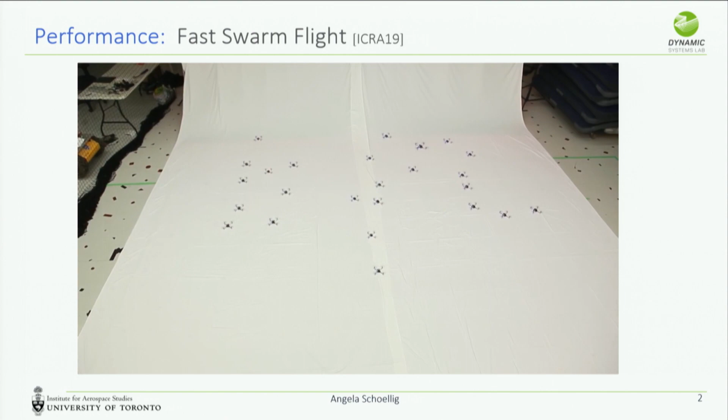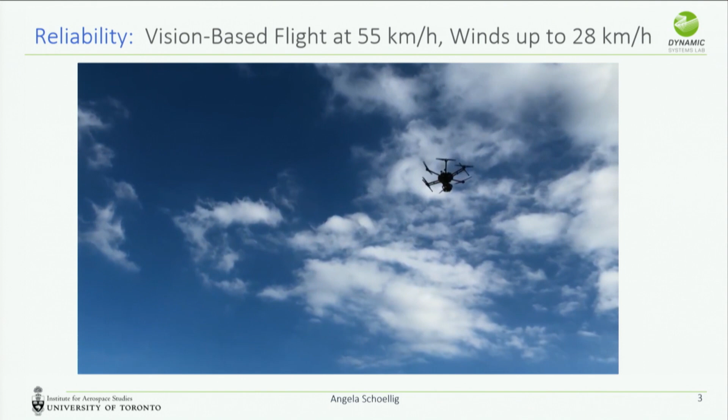We also fly these vehicles outdoors based on vision at speeds up to 55 kilometers per hour, and during our tests we have winds up to 28 kilometers per hour. So we want to fly these vehicles reliably, given that they are outdoors and quite heavy and dangerous.

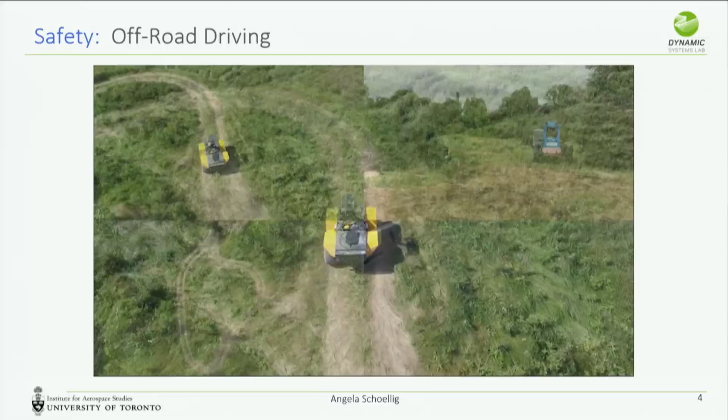We also drive outdoors in varied off-road terrain. Safety here means that we don't get off the path while trying to optimize the performance and the speed of this robot. Finally, we are part of a self-driving car competition, and we had to test in winter conditions in Toronto.

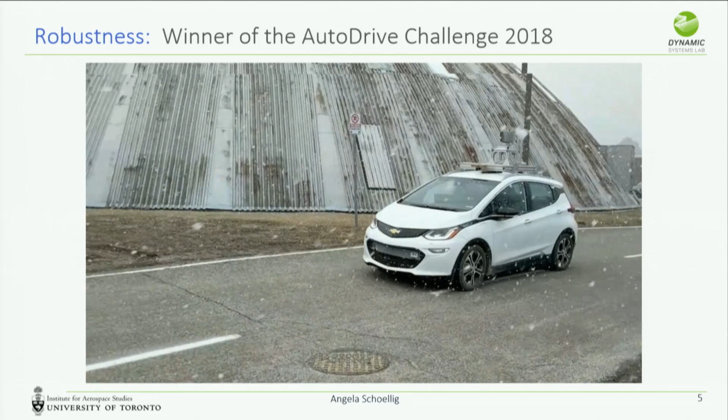Our algorithms had to be robust enough to drive at the competition in the desert in Arizona, and we had exactly 10 minutes to tune any of these algorithms.

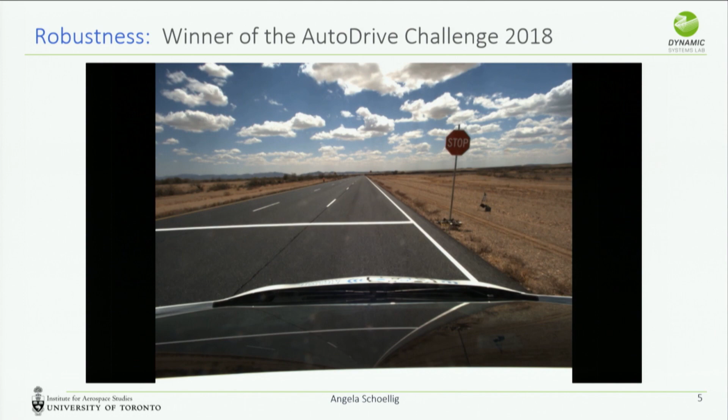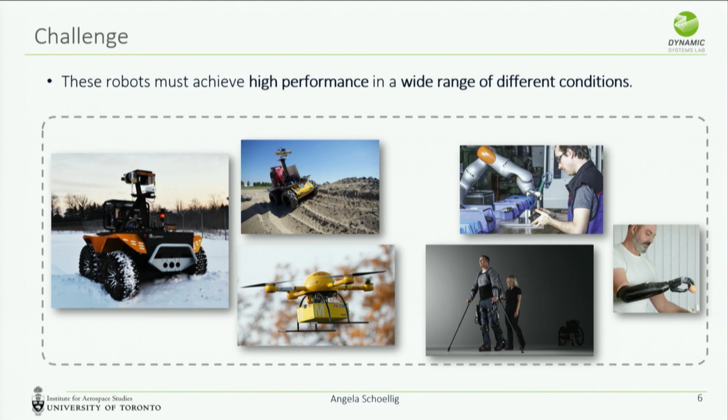So what all these examples have in common is that these robots must achieve high performance in a wide range of different conditions. These conditions can be environment conditions, but in the future, different conditions may mean working with different people and in collaboration with people.

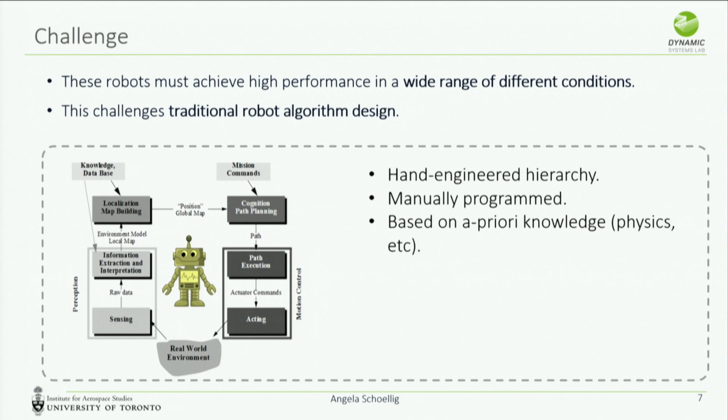This generally challenges traditional robot algorithm design, which looks usually like this: it's kind of a closed loop. We have sensors, then some state estimation, mapping, a planning component, and eventually motion control. All of this is hand engineered, manually programmed, and based on a priori knowledge, for example first principles models of the robot.

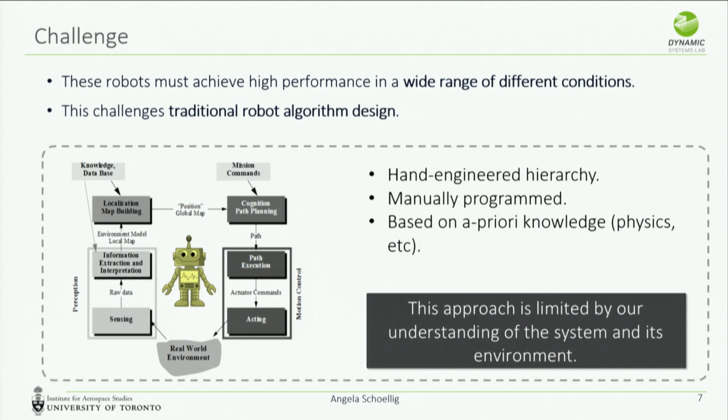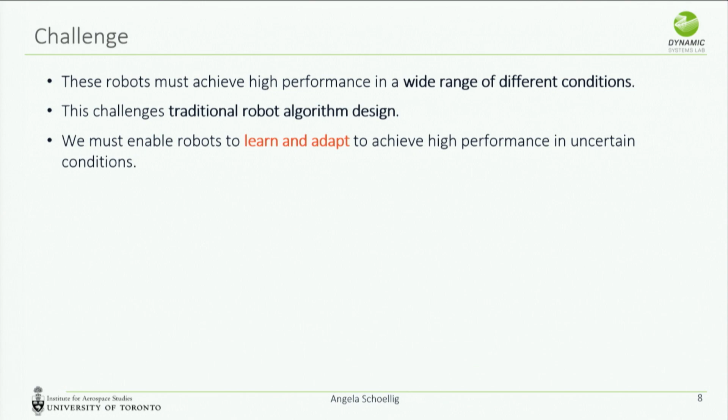So this approach is limited by our understanding of the system and its environment. To enable the applications I showed you in the initial videos, where we have a wide range of different conditions, we really have to enable robots to learn and adapt to achieve high performance in those conditions.

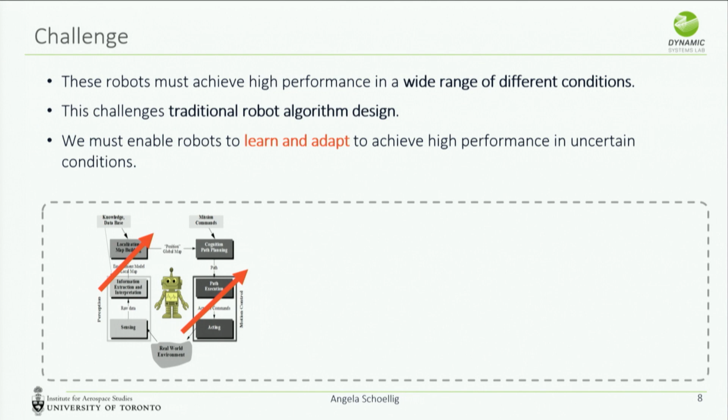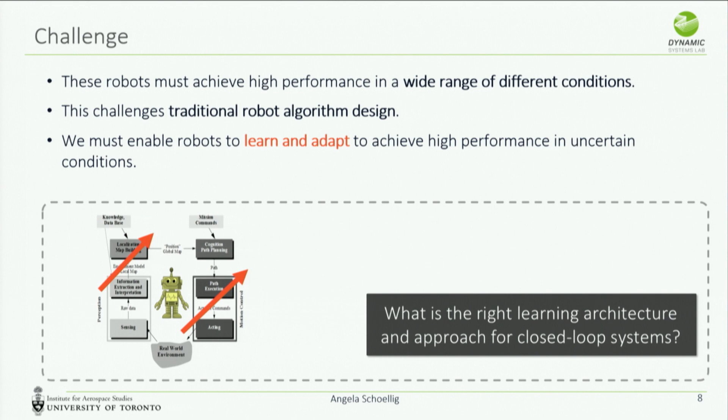Learning and adaptation in this case can mean many different things. You can put a learning component in every module - vision, planning, control - or you could do one big neural network end-to-end from pixels to volts. So I think one really big and interesting question is: what is the right learning architecture and approach for closed-loop systems? I don't think it's really answered yet.

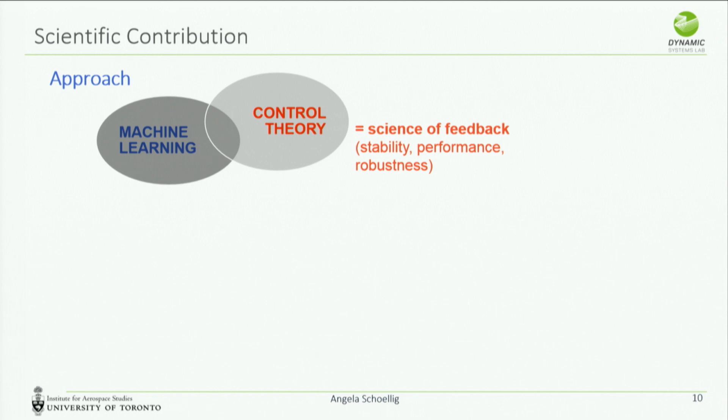The approach that we have been taking over the past few years is combining machine learning and control theory, which is the theme of this conference, which is great. In my opinion, control theory is really the science of feedback - the only science that looks at these closed-loop systems and analyzes and defines stability, performance, and robustness. Machine learning, on the other hand, is the science of data and inference. Both together are a powerful combination to tackle some of these problems.

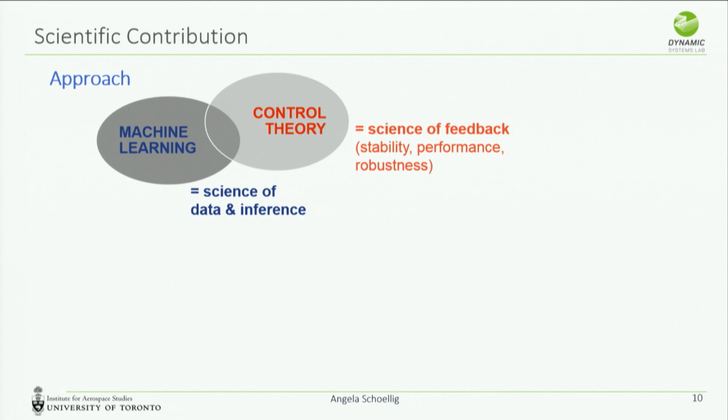The particular focus of our group has been, because we work with real robots in the real world, on data efficiency, because every data point costs money and time; on online adaptation, because we don't assume we have simulation environments that really reflect the real world; and on safety guarantees for these closed-loop systems, because some of the robots we work with are quite serious, and it would be traumatic to destroy them.

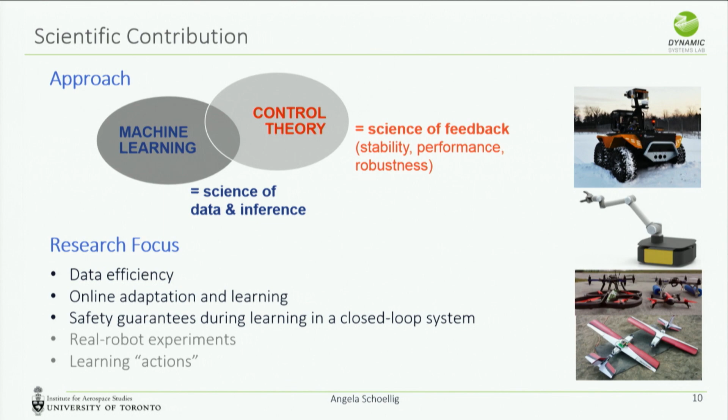So what I thought I am going to do in this talk is highlight 3 themes of the research I found, where I can show you how control theory and machine learning can nicely work together. The first one is architecture and hierarchy. Control theory has helped us a lot in appropriately placing the learning in the overall system architecture.

Control theory and generally system dynamics allows us to understand the system, even if it's complicated and we may not be able to identify all its components. It gives us an understanding, especially of systematic versus random effects - where systematic effects are things a learner can nicely learn from data, versus random effects where the best thing you can do is really fast feedback.

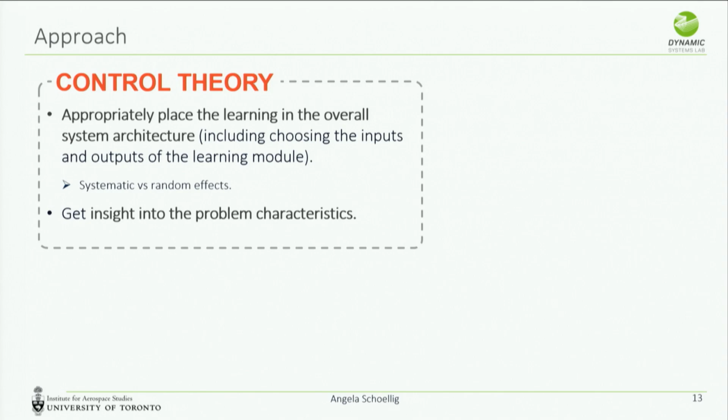As an example here, for flying vehicles, you have these nested control loops, starting with the lowest control loop, which is motor control. The motor controller just makes sure the motor spins at the turn rate you want. At the highest level, if you close all these nested loops, you have position control. In the middle, there's a controller that makes sure a turn rate around a body axis is achieved.

By closing the right number of loops to account for the random effects with feedback, we have a repeatable input-output pattern that is easily learnable in machine learning. I think that's a nice way where both control theory and machine learning can complement each other.

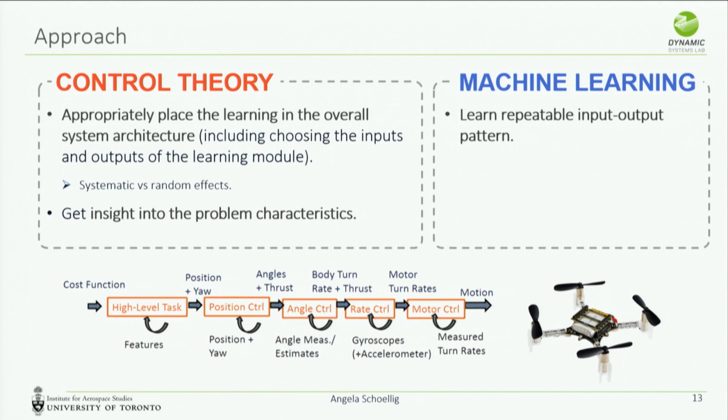One very early example we did is a robot learns a single task through repetition. There we close the feedback loop such that the system is stable, and then we learn the reference signal, the input signal, such that the output does what we want it to do. The basic idea is you run the experiment, you see how much the actual output deviates from the desired output, which is delta y.

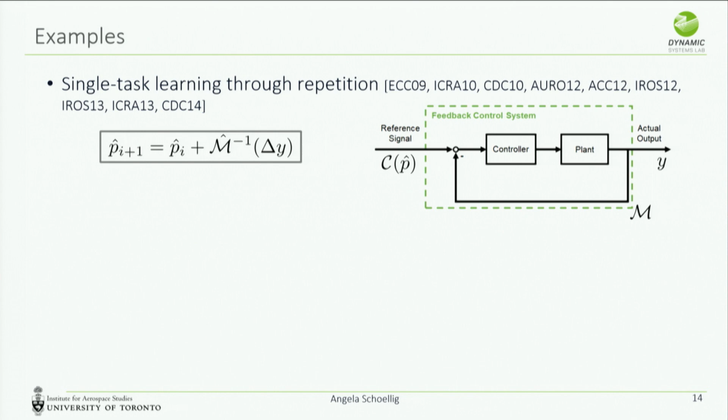Then you use a rough first principle model that relates this output error to a change in parameters, and you change the parameters of your reference signal iteratively in the right direction to eventually get good performance. We did this on flying vehicles with an S-shaped desired trajectory.

If we learn the desired turn rates directly, we can learn that, and our learning converges. But after the reference input converges and we apply it repeatedly, you see the red lines, and they are not a nice S shape. The reason is we didn't close enough lower level loops, so there's still too much randomness in the system.

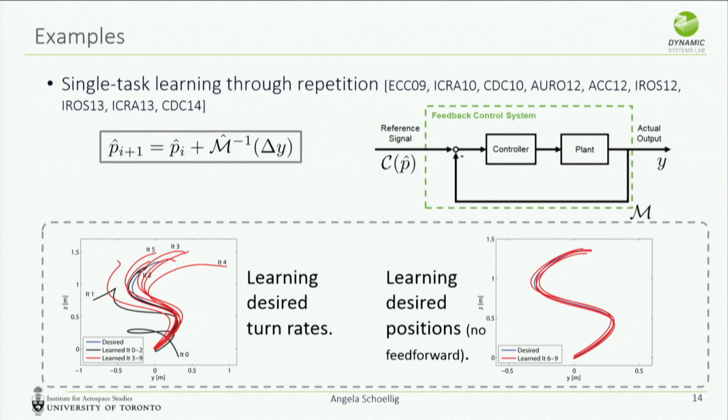So the ultimate performance we can achieve with our learning controller isn't good. But if instead we learn desired positions, with no feed forward—that was the configuration giving the best and most repeatable behavior—then the learning can converge, and the converged reference position input leads to repeatable behavior in the output, nicely following this S-shaped trajectory.

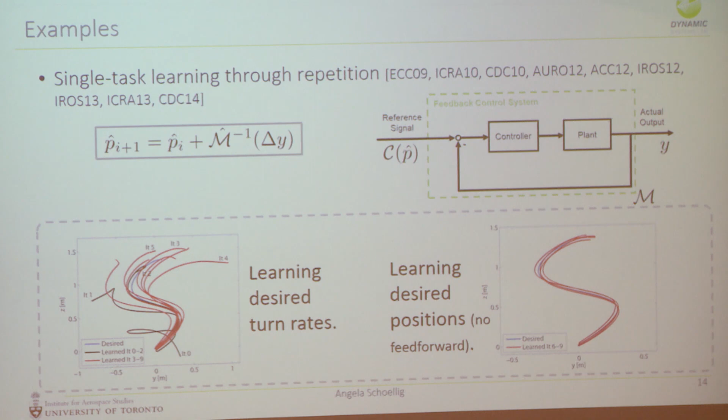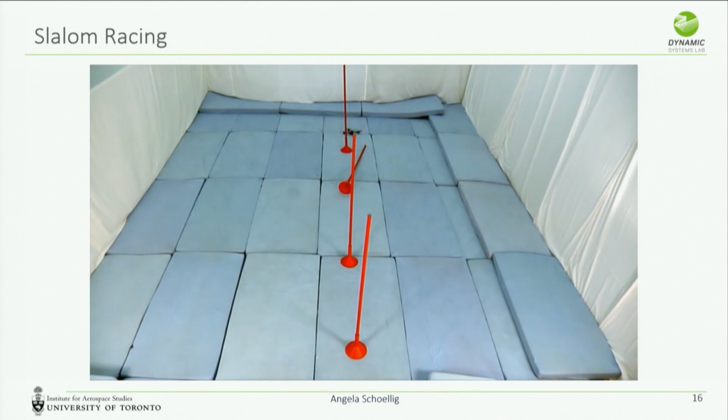So we used that for slalom racing, and in this case, if you don't use learning and there's quite a lot of unmodeled aerodynamic effects, it really doesn't work as you'd hope. So we used exactly the technique I described.

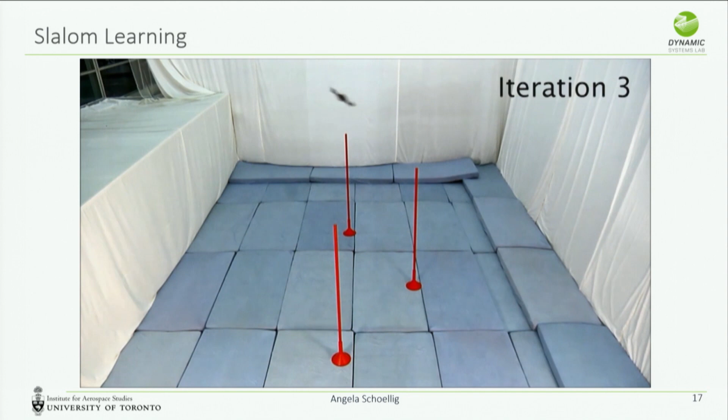Because we close all these underlying controllers, it converges very quickly. The other reason for the quick convergence is that we use our prior model information as a gradient in the learning. So after 3 iterations, we can actually do this, and we can learn arbitrary configurations.

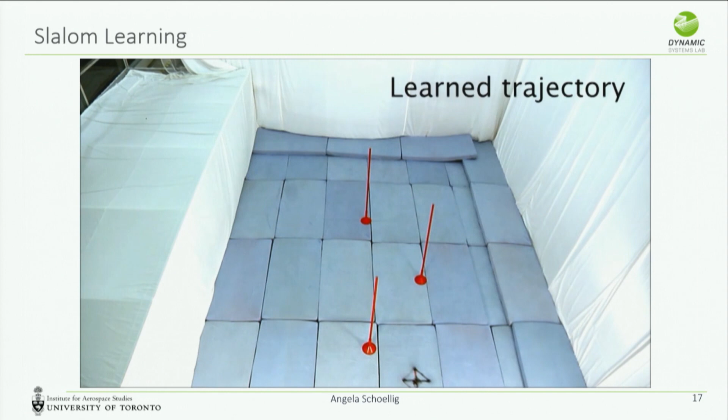But this was task-dependent learning, so every configuration needed to be relearned. So we thought of an idea where we can learn a model instead, learn it once, and use it for any arbitrary trajectory.

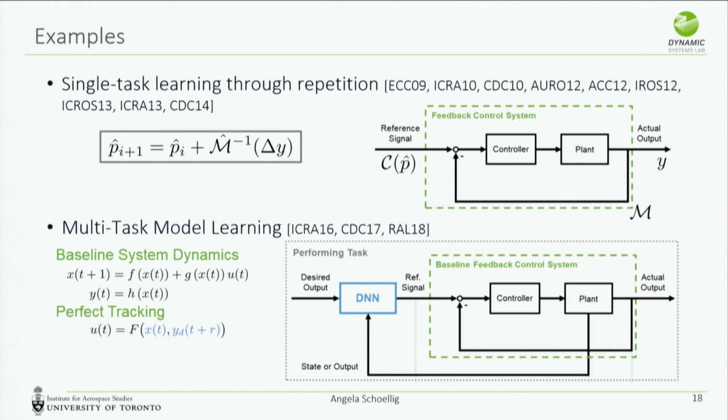We showed, again from control theory, we can quickly get insights. Even if we know nothing about this dashed green box, if it's a generic nonlinear system, if we do the inverse, we would know that what needs to sit in this blue box is this function F, which is dependent on the state and the desired outputs, steps in the future, and r is the relative degree of the system.

So control theory, even if we know nothing about the system, can tell us what roughly needs to sit in this black box, this blue box, and help us choose the right input features.

Those input features are relatively easy to get, and even if you don't know r of your underlying system, you can do a quick test, like a step response experiment, to get this value and go from there, learning much more efficiently than thinking you need more input features.

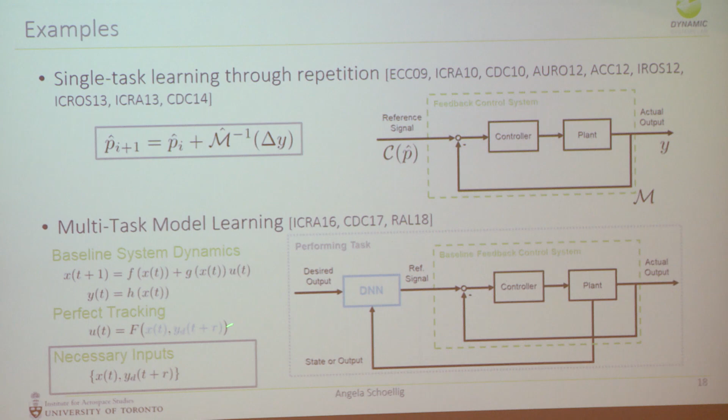The good thing is we learn this box from a number of trajectories, and then we keep it fixed, and we can be better at tracking any new trajectory.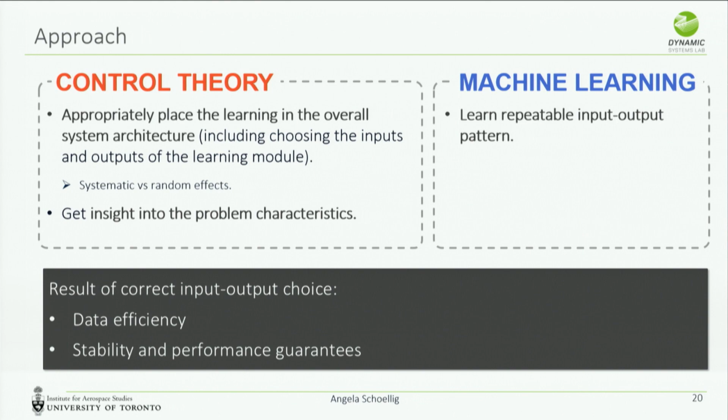So I think there's lots to explore there. These were just two examples of how you could play with where to place the learning in the overall architecture.

Another interesting area we have been working on is how can we achieve safe learning. If we drive these robots outside, we want to guarantee with high probability that they don't crash. Control theory has really nice methods to guarantee stability and performance for uncertain systems - that's robust control theory. Usually these uncertainties are fixed a priori, and then they use techniques such as Lyapunov theory to prove stability.

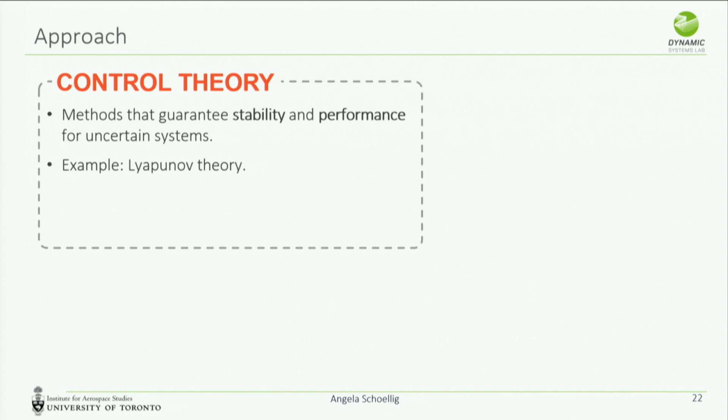On the other hand, machine learning, if we make very weak assumptions about the unknown effects, such as continuity assumptions, there are probabilistic learning models, such as Gaussian processes, that provide us high probability bounds for a function. And those high probability bounds shrink as we gather more data.

So one of the first approaches that we did was that we model our system like this. We have an a priori model, which can come again from first principles, a kinematics or dynamics model, and then a model error that we are learning. We used a probabilistic learning model in order to specify those uncertainty bounds.

Initially, we need to assume that our true function lies between the initial assumptions of the uncertainty bounds, so you can make them quite large. But then as you gather data from the system, you learn more about this model error, and you shrink those uncertainty bounds. With some formal assumptions, you can guarantee that those uncertainty bounds that you get from your probabilistic model are actually true high probability bounds for your system.

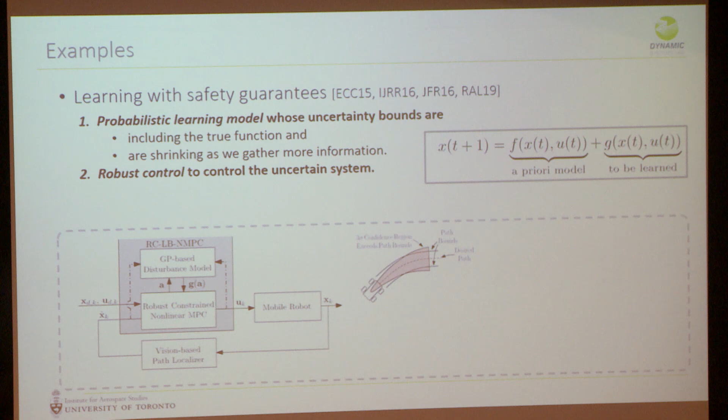At a given moment, the robot sits here, and with model predictive control, it uses its model to predict into the future. So for a fixed input sequence, the robot may end up anywhere in this envelope. The reason why it's ending up anywhere in this envelope is because we have this stochastic model, like this Gaussian process, which doesn't tell us exactly what the robot does.

So before learning, we have a high uncertainty, and what it does is that it reduces the speed, meaning that over a fixed prediction horizon, we don't get as far, but it makes sure that we stay within the path bounds with high probability based on our probabilistic model.

After learning, the probabilistic model is more certain, and we can try faster without getting off the path. So we did a lot of off-road testing. Here's one example: on the left, the robot driving the first time, and on the right, the robot driving the same path the third time. It drives significantly faster, and you see the uncertainty envelope is smaller.

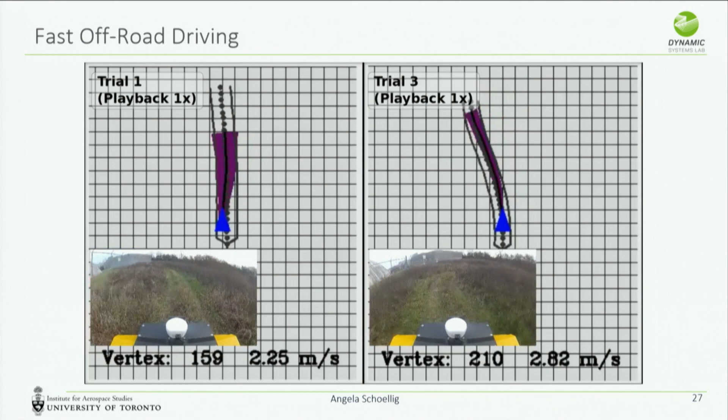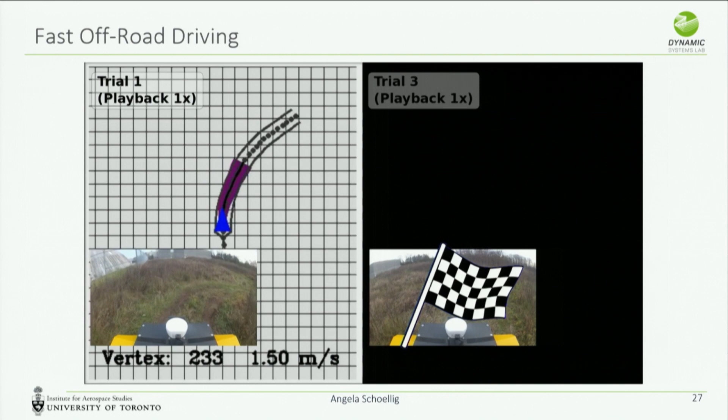We drove this robot with this method faster than we have ever done, without being too worried that something happens. So it finishes this particular segment of the path faster than it did in the first round.

We also tested this on 3 different robots without really retuning the algorithm. One robot was from the Canadian Space Agency, one from Defense R&D Canada, and one smaller robot in our lab. So it really showed that it's basically applicable on various robots.

We also have really interesting, more recent results on safe model-based reinforcement learning. I assume this is in collaboration with Andreas Krause, and he will tell more about that. But the idea is that reinforcement learning usually doesn't have a notion of not trying out actions that very likely lead to disaster in some form. So this is kind of crazy.

First, in a real system, you try things out that are dangerous. But even if it's in simulation, you would think this is not very efficient. You try things out that you know possibly a priori will not lead to success. So why should you even try it out?

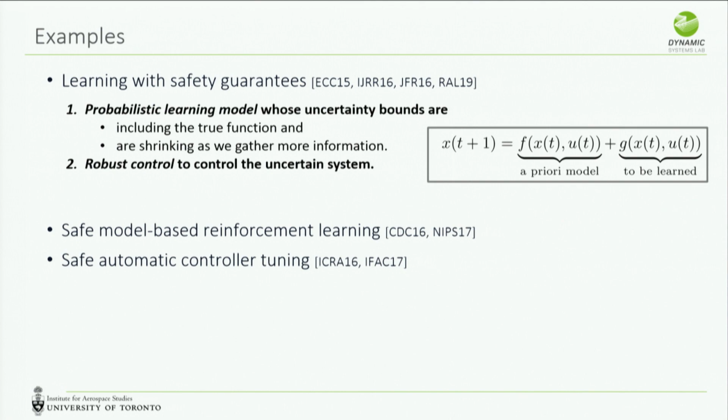And then we also used Gaussian processes in a more model-free approach to do safe automatic controller tuning. We applied this to tune an adaptive controller, which was really interesting because there are no really optimal tuning strategies for adaptive controllers.

So in summary, when we combine these 2 techniques for safe learning, we could achieve safe exploration under some assumptions, data efficiency, and certain performance guarantees. Whenever you need to do the proofs, which I omitted here, you make some very weak assumptions, but our goal is always to make very weak assumptions about the things that we don't know — in this case, about the unmodeled or unknown model error.

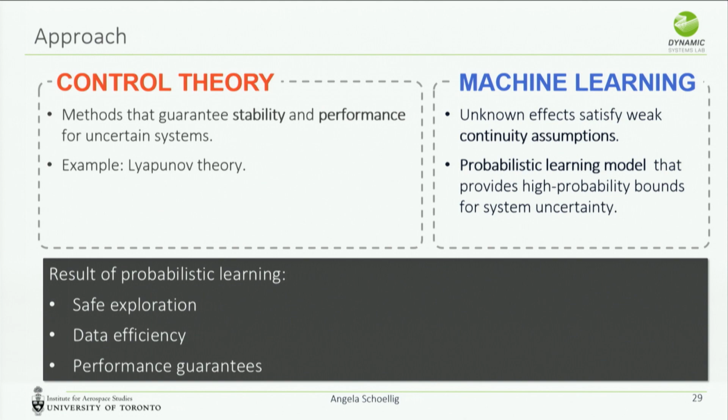Finally, the last idea is something we are very actively working on, and it combines fast adaptation with long-term learning. From control theory, we know that fast feedback is a really effective way to control a system, especially under disturbances. So our idea is: can we combine fast adaptive feedback control to force the robot behavior in a particular way, and then do high-level learning?

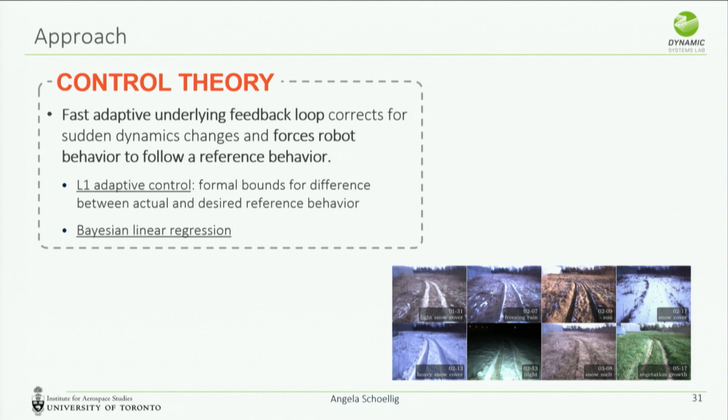This is an image of our off-road robot traveling the same path over 4 months. In Canada, it experiences freezing rain, a lot of snow, then at some point it's really wet, and eventually maybe there's spring in May.

These conditions are really hard to predict, and if the robot goes out and has never seen this condition, the best thing you can do is really fast feedback and adapting very quickly. But on the other hand, you could learn something from this winter for next winter, so you could rediscover a condition you may have seen before.

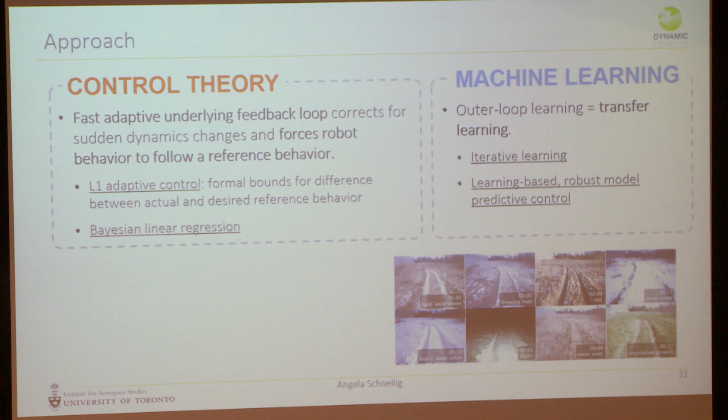On the control side, we looked at L1 adaptive control because it provides some formal bounds on the difference between the actual and the desired behavior. Then on the higher level, we use techniques similar to the Slalom Learning or the off-road robot approaches you saw before.

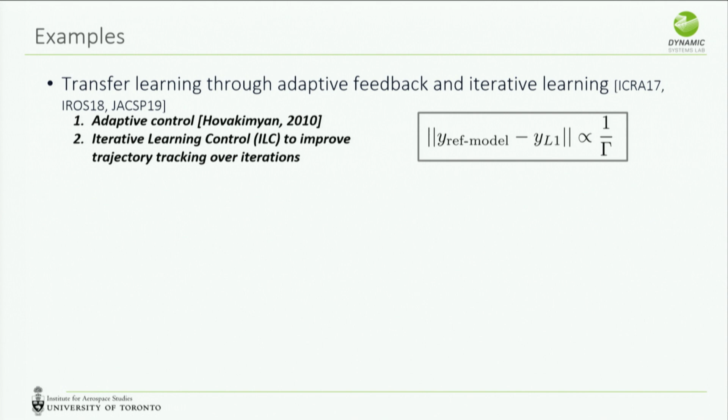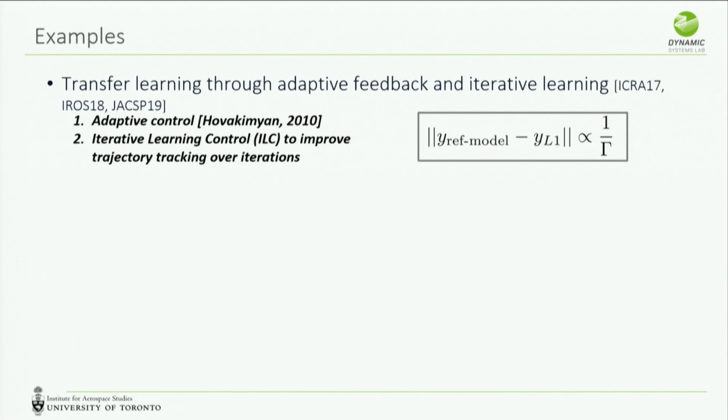Adaptive control, especially this L1 adaptive control, provides a bound between the output of a reference model that you specify and the actual system under the L1 adaptive controller. This difference is bounded by a function proportional to 1 over gamma, where gamma is an adaptation gain that you can choose very large, so you can make this difference small. So if you put this adaptive controller at the lowest level, the dashed box performs very closely to a reference model that you specify, which could be some linear or second-order system.

And then you can put on top something that further improves the tracking performance or does some other higher level learning. The goal, in our case a simple goal, is that the desired trajectory matches the actual trajectory.

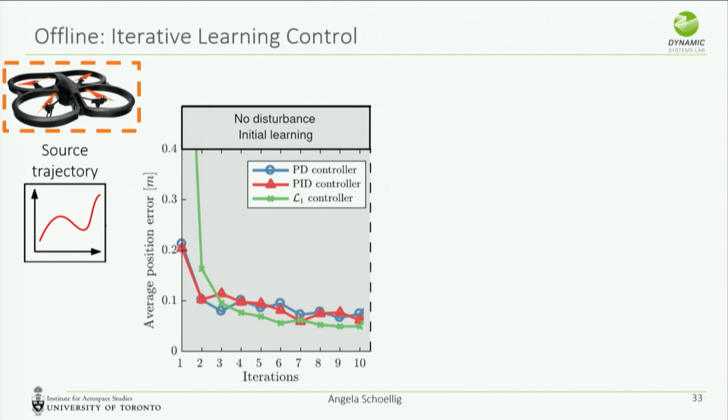As a first test, we tested it on a flying vehicle. Here you see the flying vehicle doing a certain task multiple times, and on the y-axis you see the average performance. As it does the task multiple times, it gets better, similar to the slalom learning. But we do it for different underlying controllers: a PD controller, a PID controller, and this L1 adaptive controller.

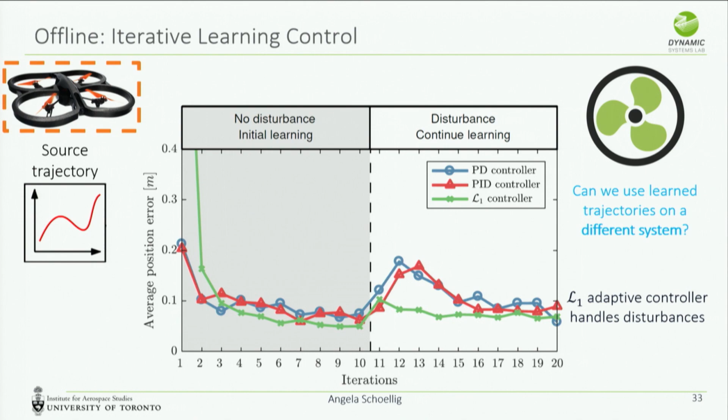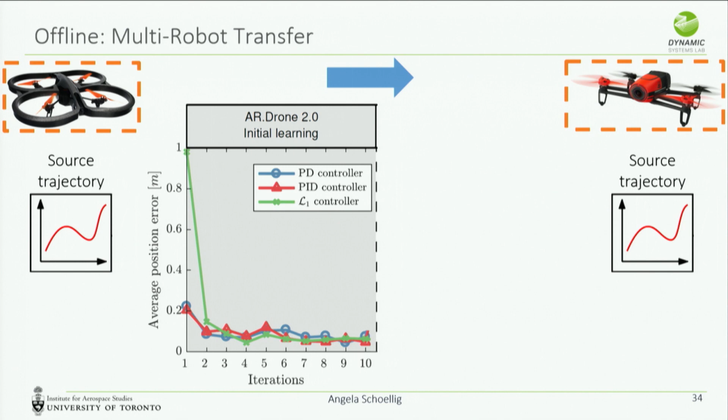Then we were wondering, can we even use that to try it on a different system, like transfer from one robot to another robot? So we did some first experiments—we are in the process of doing and analyzing this more—where we transfer this knowledge to a similar but different robot, different in weight, different in the inertia values. Here we try to do the same task with both of them again.

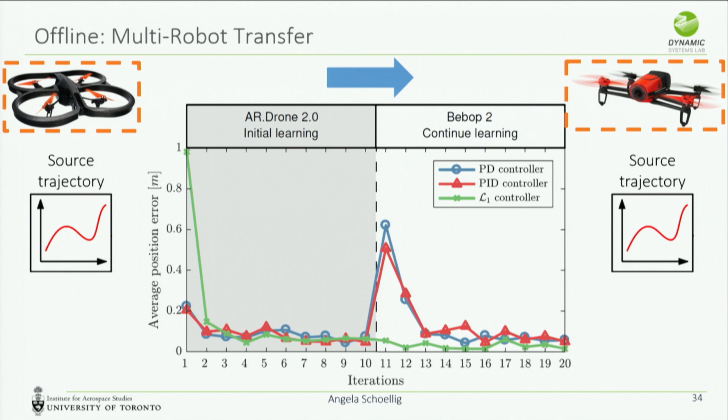And these are the results. So again, the high-level learned policy can be readily used because this L1 adaptive controller makes those two systems basically look the same on the higher level. So that was quite promising.

And then we recently extended this work to learn with one robot a task A and then use that knowledge to do task B with another robot, again relying on this underlying controller. This actually works really well and is very simple multitask, multi-robot transfer with very, very little data.

Another very recent result is where, for this off-road robot, we really store any data point that we get and do, on the one hand, fast adaptation with Bayesian linear regression, and long-term learning to improve our predictions of those systems.

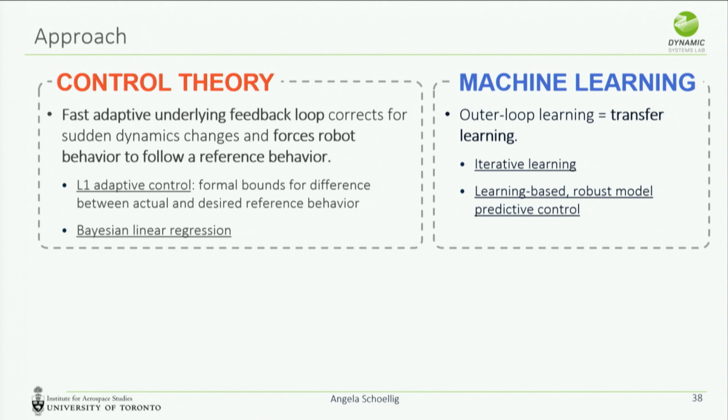So overall, by combining this very fast underlying feedback with high-level learning, we could get safety through fast adaptation, and we can long-term optimize our performance. We work both on more formal proofs, especially for the last work I showed you, and have proofs for simplified scenarios for other techniques. You can look at the papers for more details.

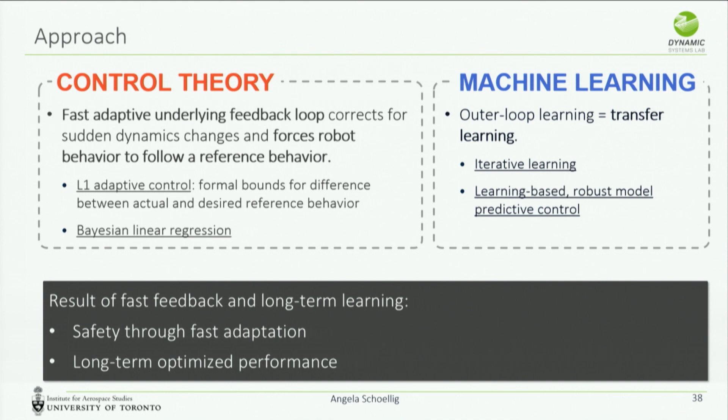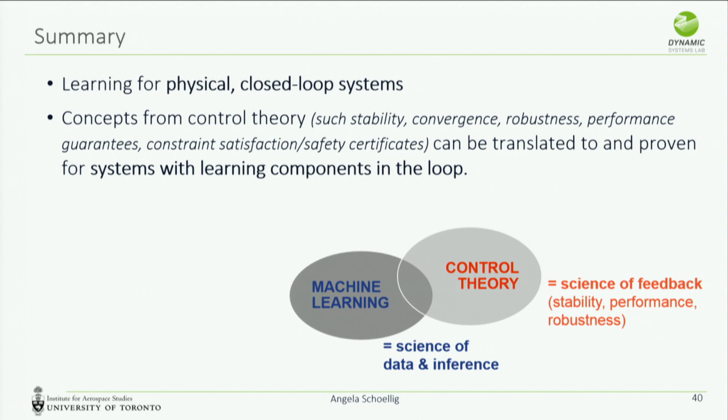So in summary, in control theory we should be concerned about learning for physical closed-loop systems. I think the concepts from control theory are really relevant and interesting to analyze for learning systems—concepts like stability, convergence, robustness, and performance guarantees have been defined in control theory and are not necessarily known to people in other communities. In our case, we showed for some very specific cases that we can be very data efficient, achieve online adaptation, and safety guarantees during learning by combining machine learning and control theory concepts.

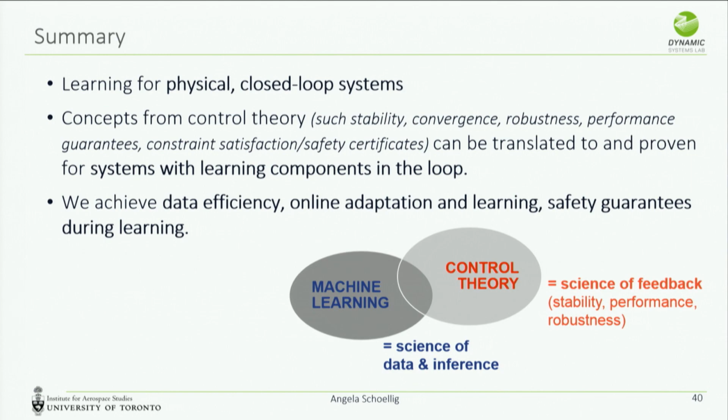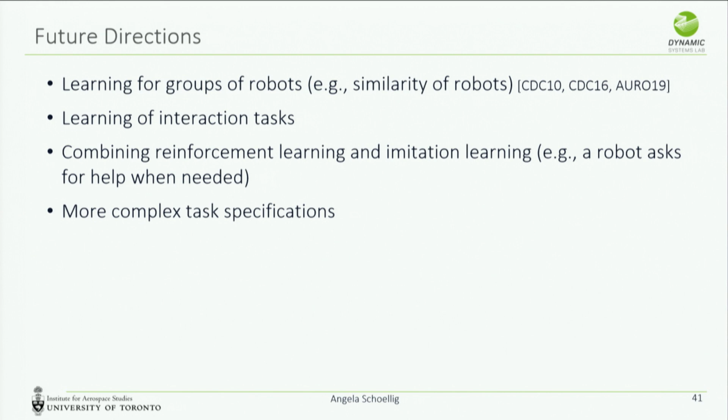But I think there are many open questions, and some that I find interesting are: how can groups of robots learn? When can knowledge from one robot be transferred to another? What is a measure of similarity between robots? How can we extend these techniques to interaction tasks, where robots actually interact with the environment? I think also an interesting question is how can we combine reinforcement learning and imitation learning—can a robot ask for help when it's needed and a human could provide input? Then we got stuck with stability and maybe trajectory tracking, but what about much more complex task specifications?

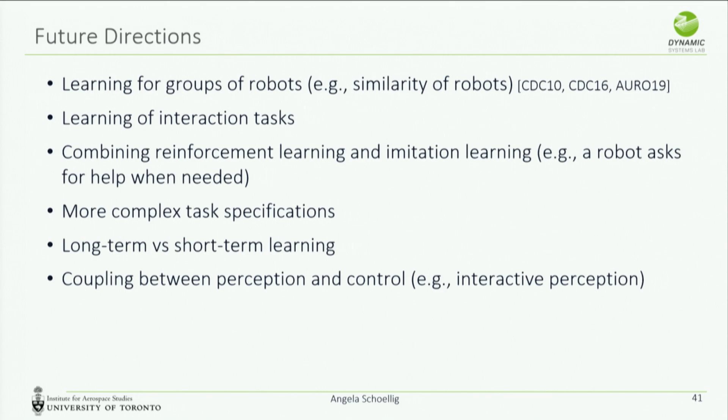Again, long-term and short-term learning and how to trade that off, and how to eventually couple perception and control, because what we see in robotics is that almost every single module in this closed-loop system, from perception to control, has learning components incorporated at this point, especially in application areas like self-driving cars. So how do we analyze that and properly design that? There are many more questions.

I think it's an interesting area, but people have made progress in small ways. I think there are many open questions. If you are not convinced, read the Science Robotics article where they highlight 10 grand challenges in robotics, one of them being aspects of artificial intelligence, highlighting things like limited data, learning on the fly.